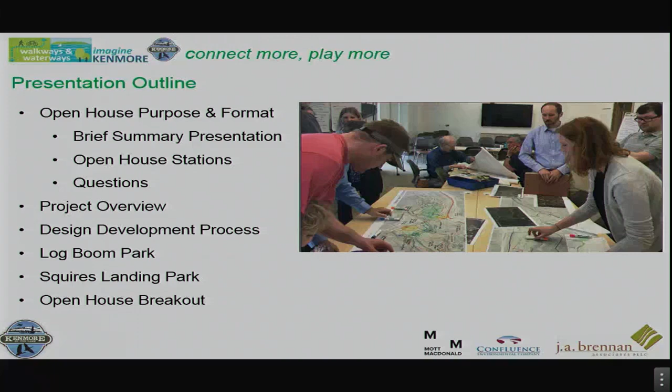So the format for tonight, we're doing this presentation for a couple of reasons. Give everybody an opportunity to hear some of the details about how did we get to where we're at from the last public outreach and the master plan that was part of the bond measure, and then update you on where we're at this point.

And so the presentation here, there's the other purpose is there's a number of people that can't make it tonight. And so this is being recorded and can be posted onto the city's website. So those who couldn't make it will have a chance to get the same kind of overview as well.

So what we ask is we're going to try to get through this in like 20 or 25 minutes. And any questions you have, just hold them until we're done. We're going to break back into the session with the boards in the back.

So first is I'll go over a quick project overview, the design development process, and then we'll get right into some details on Log Boom Park and then Squires. And then, as I said, we'll get back into the breakout session for the open house.

So the design development overview, so a couple things. Over on the map here, we got Juanita Drive, Lake Washington, the Sammamish, Bothell Way for perspective. And so tonight we're just talking about two projects. Log Boom Park is over here. It's a waterfront park on Lake Washington. And then Squires Landing Park over here off the Sammamish and Swamp Creek.

So these projects came out of the Imagine Kenmore, the public outreach that started back in 2015. And our team was hired back in 2015 to come up with the master plan at a very high level, listening to what the community said back at that time. We looked at a variety of different alternatives and incorporated that into the master schemes that became part of the bond measure, the Walkways and Waterways, that was adopted in the fall of 2016.

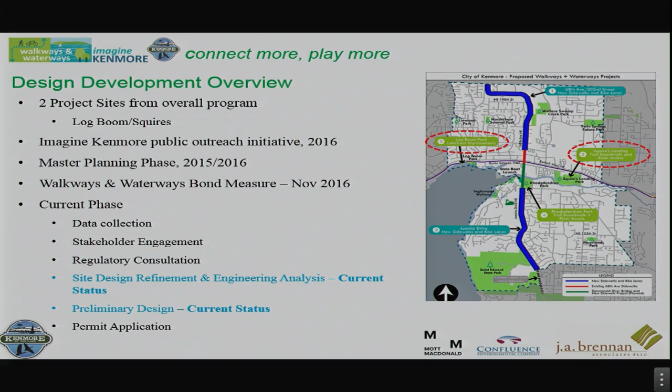So that brings us to first Log Boom. Bothell Way here, Burke Gilman Trail, and then the existing boating facility pier.

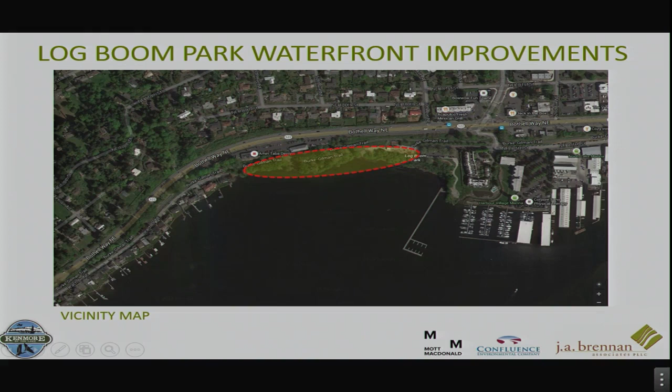Going back to that outreach that was done back in 2015, 2016, the community really expressed a lot of interest in getting more access to not only parks, but to the waterfront. And so out of that came the project goals.

What you see listed here are the primary goals for Log Boom, and there's a lot of similarities also in the goals over at Squires Landing. First is improving the access to the shoreline, and then improving circulation within the park. So people coming to the park, either by bicycle, pedestrian, or car, once they're in the park, improving their usability and circulation within the site.

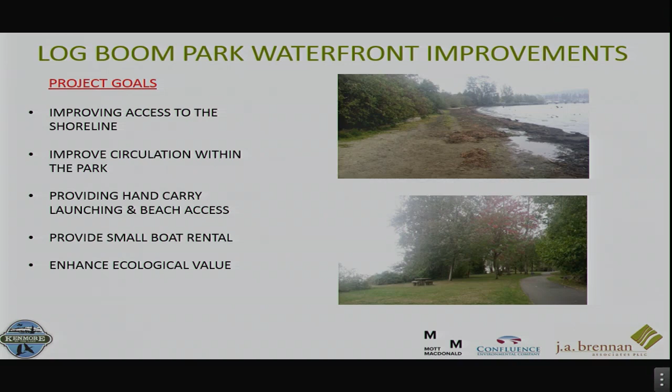With that improved circulation is having additional access points to the waterfront, and that includes an expansion of the existing beach, which would be a gravel foreshore and a sand back beach. Then also providing a boat rental facility, so people that don't have their own hand carry boats would have the opportunity to still get out on the water through a rental program and some storage. And of course, providing ecological enhancement and restoration is part of the project too. We'll get into that more here in a few minutes.

Before talking about the improvements, I think it's important to talk a little bit about the existing park features. As you come in by car, we've got the existing parking lot here. There'd be no changes to the parking lot; it would stay as it currently exists.

As you come in further, there's a series of pathways, a playground, and a pump station that's part of the metro sewer line that comes through here, with an easement through there. Then there's a restroom facility. The white line here depicts the property boundary, so the city park is actually on the water side of that white line — you can see it's a fairly narrow parcel.

There's some wetlands in here, so there's some constraints that we had to work around. As you come along the other side, there's a pathway going out to the pier, and none of this has any change either. So really the major change to any existing park features would just be a localized area of the existing pathway that would be removed in order to tie in to the new facilities and the new pathway that's there. All the other features would remain as is.

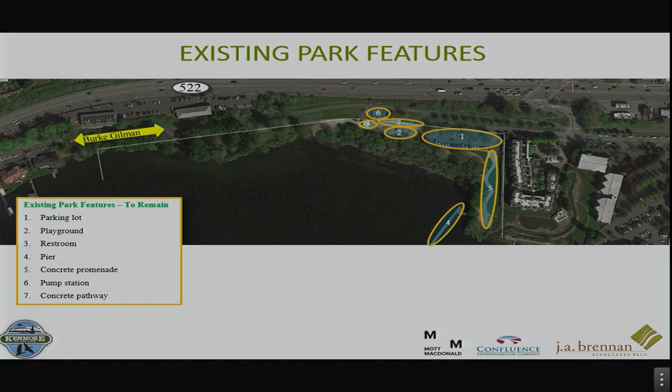As I mentioned earlier, for the bond measure, this was the concept plan that was part of that, and this is what we've been working on refining in more detail. Again, for reference, Bothell Way is up here, the lake, and the parking lot.

There'd be enhanced access walkways coming through here with new pathways. A rental building would be right here, right off the pathway as you first come into the expanded park. There'd be a hand carry launch here for kayaks and other paddle boards and things like that. An expanded beach, as I mentioned earlier, would be a gravel beach on the front slope, but there's a pretty substantial area in the upland adjacent to the water that would be sandy.

Continuation of pathways, a picnic pavilion further down, and a couple access points. Some of these access points we ended up consolidating, based on feedback from regulatory agencies, to confine the use so we can maximize restoration of the wetlands and riparian areas of the shoreline. There will be a lot of environmental enhancements on the site through this existing high-quality wetland and other areas along the property.

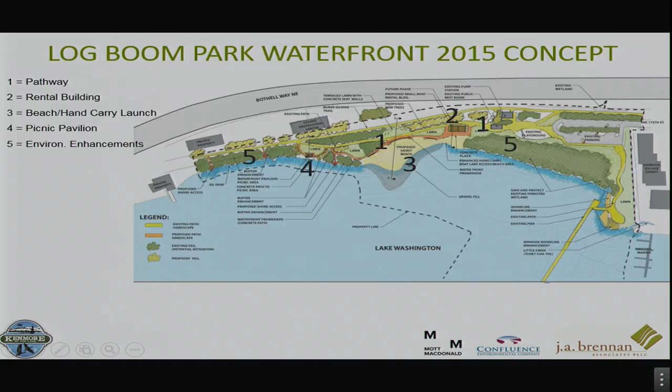As part of that consultation with the agencies, a few things came up. We collected a lot more information, including more detailed wetland delineations and surveys, both bathymetric out in the lake and along the shoreline. That helped in conducting additional design refinements and analysis, along with discussions with the agencies and consultation with King County.

King County has the metro sewer line that comes through the site, so we were trying to keep the improvements completely on city property. There are some localized areas and pathways to connect into existing pathways that would be on King County property, but the majority of improvements will be on city park property. We also mentioned avoiding wetland impacts as much as possible and reducing the number of access points, keeping those confined.

One thing that came up was a lot of questions about the beach. Is this a good location for a beach? Is it going to be stable? We did a real detailed site assessment and coastal engineering analysis. When we break out, we've got some boards back there you can ask more questions on, but it's a good location for a beach.

The back beach will be sand, and the front foreshore will be gravel.

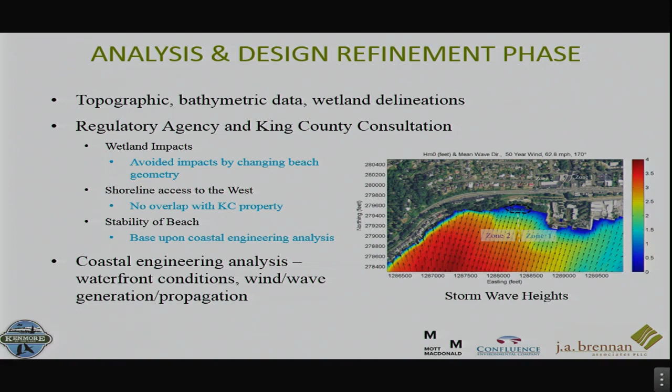I'd like to turn it over to Jim to talk a little bit more about some of the site design features. All right, thanks, Shane.

This is the updated plan, and I'll point out a couple of features. As Shane said, not much has really changed since that earlier concept design. You can see the beach shown here at summer lake level, so this will be the edge of the shore at the beach. This color is the gravel portion of the beach and then sand above that, so it's a nice spacious beach with lots of room.

In the design, what we're really trying to do is weave the new improvements into the fabric of the existing park and relate to the vocabulary that's already been established out there and its function, and really just expand on those. This will be a much nicer beach, a really fun place to spend time, and we're going to work to attract people to this area so they can get down to the water.

One of the changes we made is we moved the shelter. This picnic pavilion is now located closer to the beach so that it's nearer the parking lot. So if you arrive at the park, you can park here and then carry your boat to launch here. This is the boat rental facility with some trees flanking it, so it's kind of buffered and softened.

The path, as it continues on toward the Burke-Gilman Trail, is laid out in a flowing line that relates well to the existing design vocabulary in the existing park, with a really nice flow. There will be some plantings along the shore that improve the ecological value of the shoreline. We'll be removing some of the non-natives and adding beautiful native plants that create better places for birds and overhanging vegetation for fish. So those are all considerations.

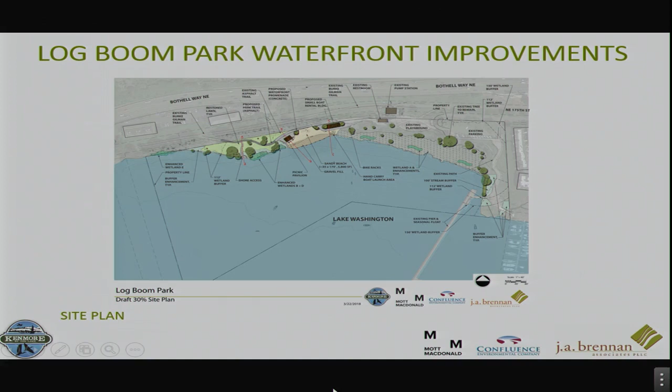There'll be an access point located right here with some concrete seat walls, a real intimate place to gather and get down to the shore, and a touch point at that existing beach there. The topography in this location is really good for that. So that's just a quick overview, and we can answer more questions when we get into the breakout. Did I miss anything, Shane? Nope. Okay, great.

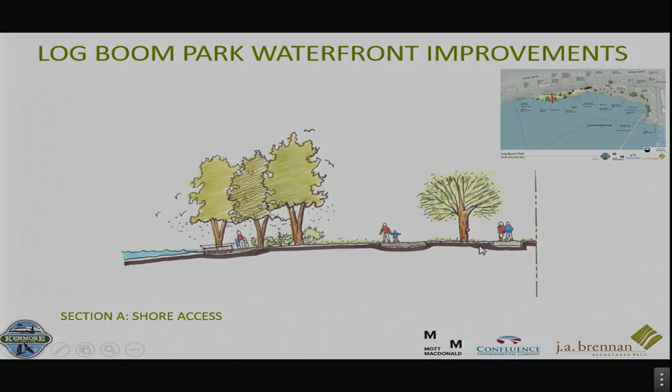So we have a couple sections that will show the layout. This section shows that touch point I talked about, where you can see it's a very gentle gradient going down amongst a grove of trees to get down to the lake. You can see the asphalt path and then a crushed rock path leading down to the lake.

Moving a bit farther east is the picnic pavilion with a concrete plaza around it, fairly modest in size, right adjacent to the beach. There's also an accessible access where you can get from that plaza out into the beach environment. You can see the sand area and then the gravel that Shane talked about, and some of the riparian vegetation enhancement.

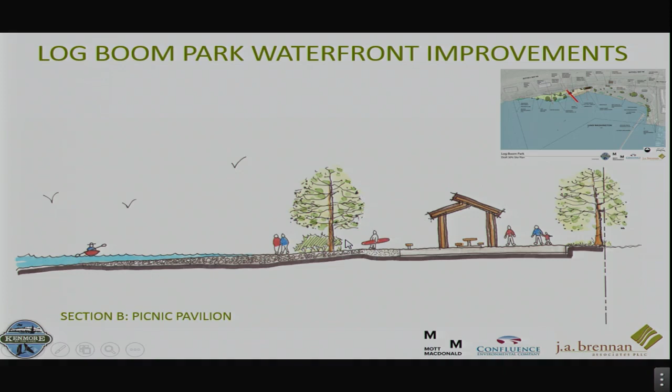Moving farther east, this is the boat rental facility. This will be a place to store some of the boats. There'll be some paving around that and easy access to the beach, and some plantings to soften that building.

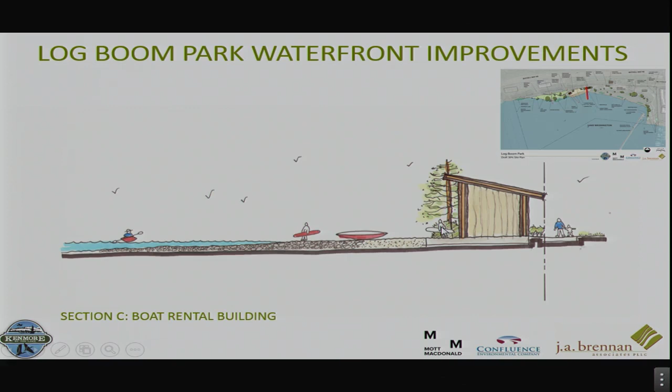I mentioned a little bit about schedule earlier, so just a bit more detail here. Tonight, the 22nd, is a public open house. Again, the next steps for Log Boom will be the permit application submission, which would be in the late spring or early summer. The grant application process through some state agencies to look for additional funding to match city funding has been initiated. That goes through October. And again, permitting usually takes some time, 12 to 24 months or so.

The permitting process, then the design, and of course after the final design would be bidding and construction. So the plan is to have construction all completed by 2023.

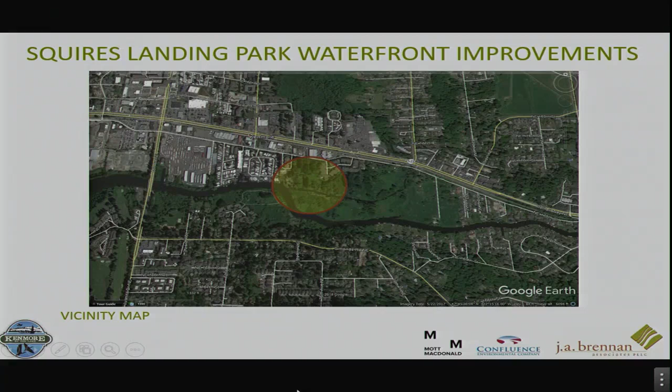So that brings us to Squires Landing, and we'll go through a similar discussion on this one. Over on the east side of the city, adjacent to Swamp Creek and Sammamish River. As I mentioned before, a lot of the goals are very similar here, but with a lot more focus on additional accessibility for hand launching facilities and also a large public gathering area.

We have a lot more property to work with on the Squires property, so there's a greater extent of pathways and public gathering and access areas here. So again, on existing park features, just to get oriented — this is a more zoomed out, and then zoomed in, view: Sammamish River, Swamp Creek, and the adjacent road.

In more detail, there's an existing west property recently acquired by the city, referred to as the Tweed property. Then we're calling the east property the larger parcel, which includes the pond or lagoon. On the existing west property, there's an access that comes down, an easement, a parking area, and some other facilities.

There's this existing mobile home that will be removed. There's a garage used for storage that will stay. The majority of this site's amenities will remain, with the exception of the mobile home.

There's a rebuilt dock out on the water and a little launch that will remain — that's relatively new, having been replaced. The lagoon dock, used for a chase boat and other purposes, will get removed and replaced as part of the project. We'll show those new docks in a moment.

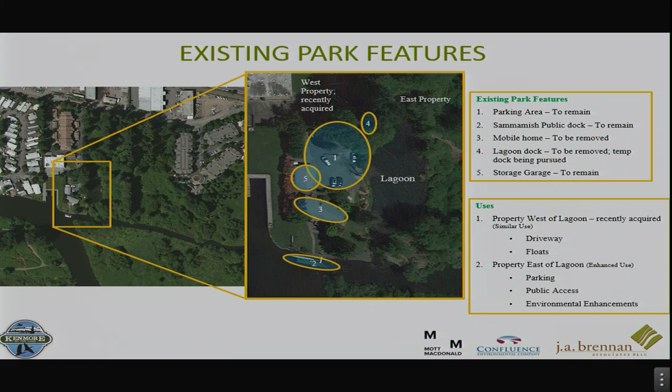So the uses will stay fairly similar, but there'll be a lot more accessibility between the two different parcels in the finished project.

So this, again, going back to the 2015 concept — I'll mention a little bit about what that was, some of the refinements that have occurred, and then Jim will go through some of the details. Coming in off 175th is over on the left, and again Sammamish River over on the right, and Swamp Creek. This is the lagoon in the middle.

So if coming in as a pedestrian off the sidewalk, or a car coming in off the road, there'd be a new parking lot here. There's approximately 30 stalls, so there'd be a fairly large expansion of parking opportunities.

There'd be a storage area planned in the uplands, with access down a pathway to a plaza. This was the larger gathering area, with some floats for a hand carry launch. And then, of course, the lagoon, a series of pathways that would interconnect to overlooks and out to the peninsula with overlooks over here.

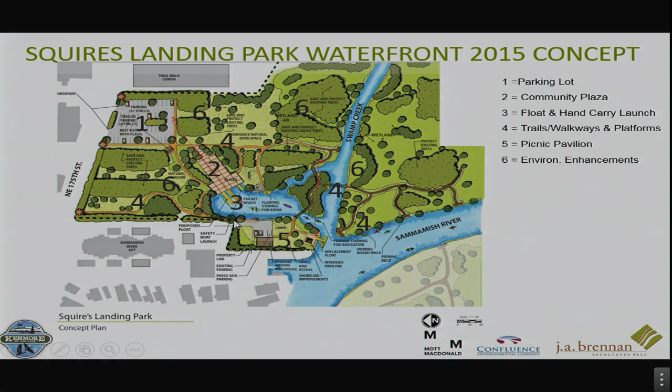This all interconnected back over to the west property and that dock I mentioned earlier, and a new pavilion. So the idea is this would all be interconnected. If you parked at the new parking lot, you could access through the pathways over to the existing parking lot, and vice versa.

The other thing is through consultation with the regulatory agencies, there was a lot of interest in water temperatures and water quality, both in Swamp Creek and in the lagoon. As part of that analysis, we went out and collected water temperature data at the end of the summer and early fall. Based on that data and our analysis, we concluded that we would improve conditions by eliminating the one little access in here.

So originally, there's the existing access. In the original master scheme, there was a secondary, shallower access proposed. Under the new scheme, we're going to focus on a single access that's a little bit deeper, that provides better flushing and water quality.

There's been a little bit of realignment of some of the floats to line up better with the plaza, and the same amount of moorage or dock space that was shown in the master scheme is in the new plan. It's just in a slightly different configuration.

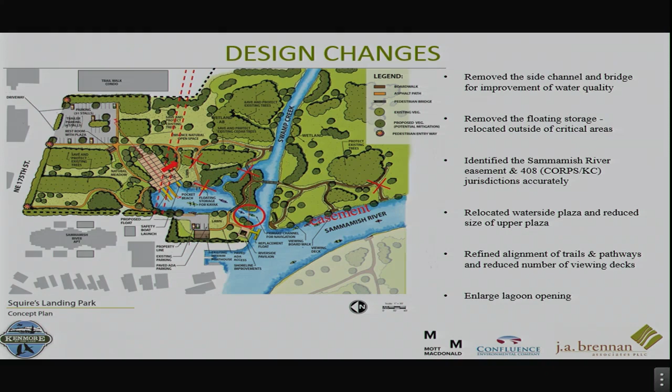Jim? Thanks, Shane. So I'll point out a couple things here, but as Shane mentioned, at the entrance we're really going to make clear signage and visual access into the parking lot area and to the restroom so that it's a really welcoming park. And there's some existing trees in this area that we're working to save.

There will be a few trees removed, but we know from our earlier public meetings that the trees were important, so you can see the groves of existing trees here, shown in this darker green, that are all going to be saved and remain.

And from the parking lot, you'll see the plaza area and the float, and really be drawn down to the water - a great touch point here. A hand carry boat launch opportunity here on a little beach pocket.

And the pedestrian entry for those who are walking or parking out on the street can enter into the park this way and either go to the plaza area or move over toward the Tweed property.

In this area, we are not really changing anything much. The parking will remain as it is, and the existing garage building will stay. The manufactured home will be removed, but we're replacing it with a picnic pavilion.

And you can see the bridge circulation here. We're really taking into account the opportunity for potential future extensions up the river and through the rest of the park property. Plantings will be mostly native, designed to provide ecological benefit, with overhanging vegetation along the stream.

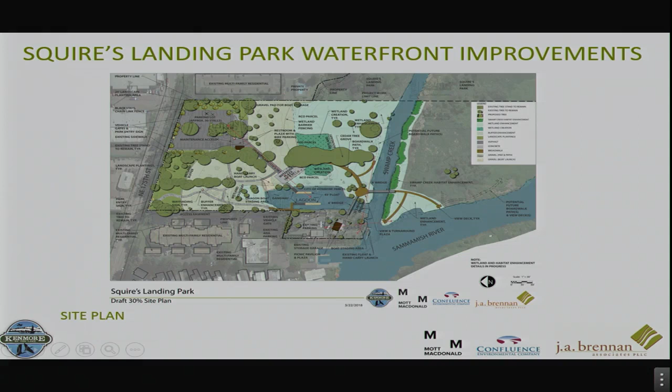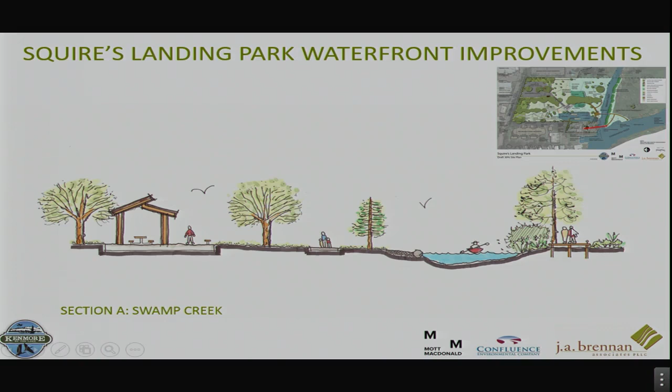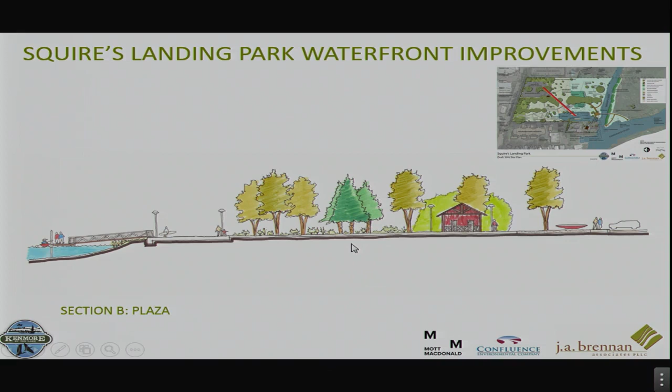And this is all accessible. And then plantings, as you can see, some of them are saving existing trees and vegetation, others are new plantings.

You may have seen the new float out there. It's really beautiful, and that's a nice improvement that's already been added. So we're just weaving this design into some of the great elements that are out there already.

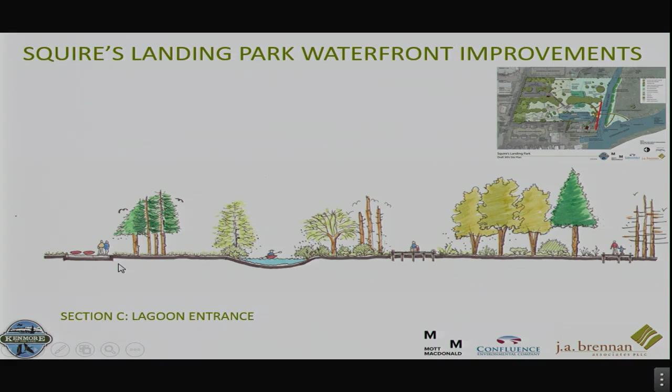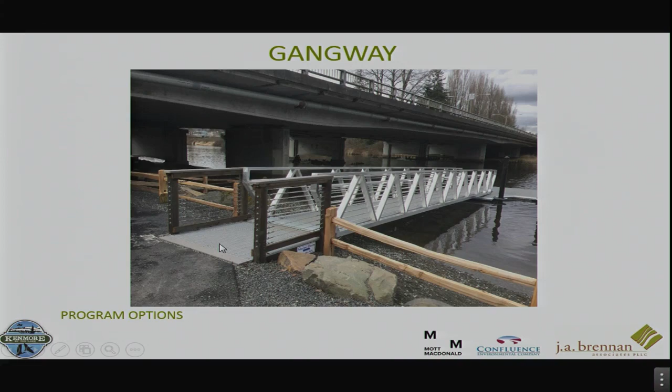Picnic pavilion could look like this, getting some consistency with other pavilions in the area, like Rhododendron Park. Just an example of what that gangway and float might look like.

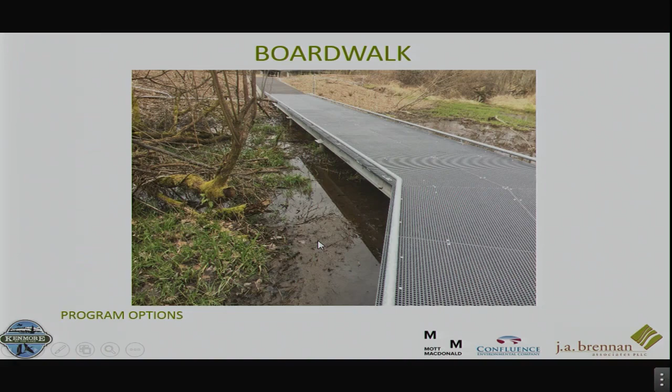Boardwalks could look like this, something that's durable and has some grating so it lets light through to the vegetation underneath. And the float could look something like that.

Opportunity to do native plantings along the creek and the river. We really want to emphasize maximizing fish habitat and wildlife benefits, getting that shading. So new plantings that will establish quickly, a mix of conifers and deciduous trees and some overhanging shrubs.

So back on the schedule, open house tonight on the 22nd. We'll be moving into the preliminary design and permit application submissions later in the fall this year. This is on a similar track as Log Boom Park, on a grant application process with the state of Washington. Permitting, final design, and bidding would be between 2018 and 2022, with completion of construction in 2023.

So before we conclude here, I want to see, Maureen, do you have anything you'd like to add? I think Rob just wanted to know which one works. This one. Hello, I'm Maureen.